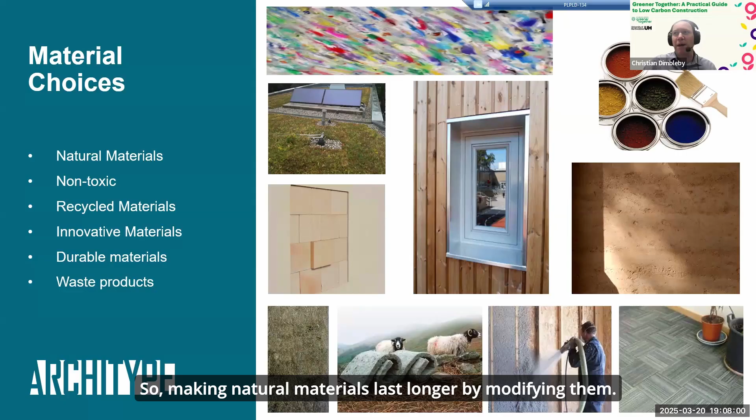Green roofs—so it's not just the material, but also what's going on around there, the elements that live there. In this case, the biodiversity in the soil and other things. To the side of that, you've got thermally modified timber, making natural materials last longer by modifying them. Some processes pickle them, some use other techniques to give longer duration.

To the right of that, you've got some rammed earth—I'll talk about a project using that a bit later. Similarly, straw bales as well, below that at the bottom left. Then next to that, you've got sheep's wool insulation, a fantastic renewable material—coming from the son of a sheep farmer, I'm very keen on using that material. To the side of that, you've got sprayed cellulose, which is recycled newspaper.

So timber broken down to its most basic purpose and reused is a great insulating material. And on the far right-hand corner, you've got carpet tiles made from reused truck tires.

So some of these are not natural, but they do show the environmental thought needed around product selection. If we move on to the next slide.

Okay, we've got time for a bit of a quiz, a bit of interaction. Which do you think is the best natural material? You can scan the QR code and we'll give you a minute or so to have a think about that. Do you want straw, timber, cork, earth, or bamboo? Do you want to all have a vote now? See which material do you think is the best natural material?

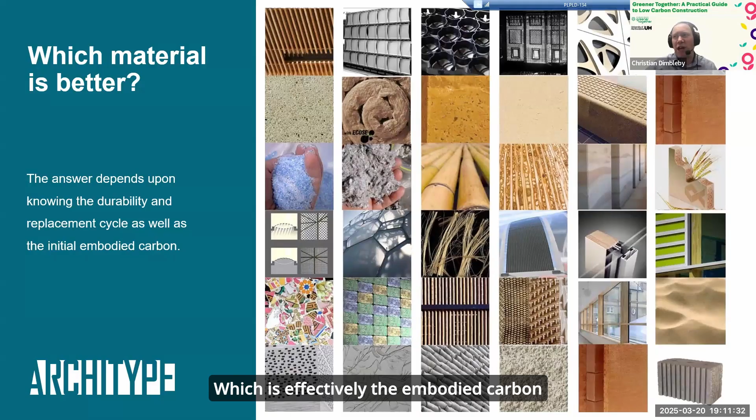But if we move on to the next slide, I think this was raised in the question, and it's always tricky, isn't it, how do you determine what is best? And it does depend on so many things. In this particular question, what material is better? You need to think about the durability, its replacement cycle, as well as the initial carbon impact, which is effectively the embodied carbon, the amount of carbon released in extracting the material, in manufacture and transportation of the material. And so you can get an answer from that, but there's still more things to consider.

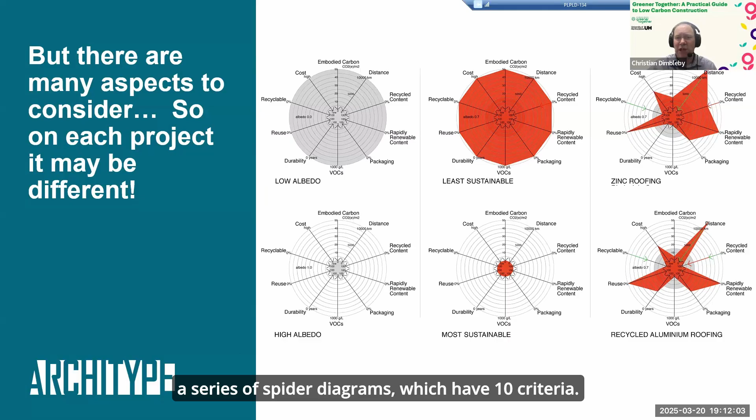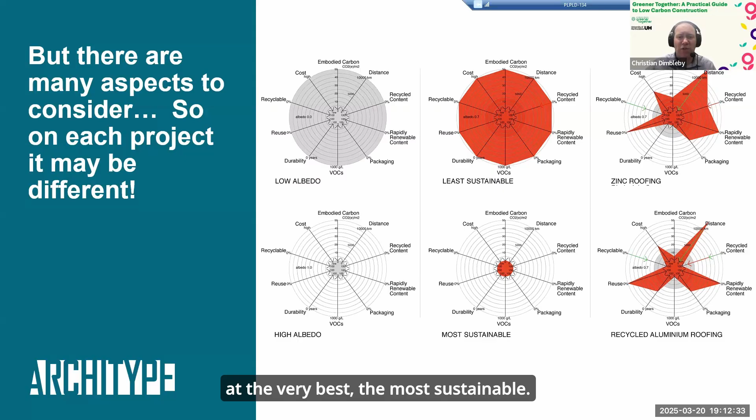So if we move on to the next slide, we created this spider diagram when we were trying to explain it to a project some time ago. In the middle, you can see a series of spider diagrams which have 10 criteria. The red is the least sustainable. So on the far outside, all of those things, whether it's embodied carbon, distance, recycled content, rapidly renewable content, packaging, VOCs, durability, reuse, recyclability, and cost, all of those are the worst aspects. And the bottom middle cell shows it the very best, the most sustainable. So there's a very small amount of red in that diagram.

But more than that, there's also this instinctive discussion about albedo. So that is an indication of how appropriate that material is to use. For example, something may be a very good material, it may be a very sustainable material in certain aspects, but it may not be appropriate to use that material. And so you have to have a reference point of how different materials compare.

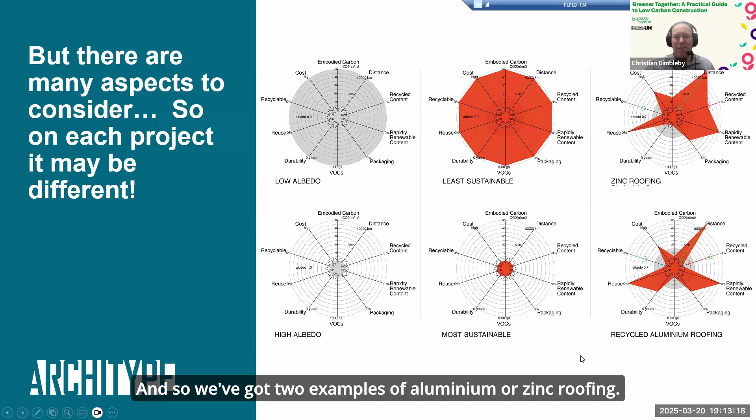So on the right hand side, we've got an example to try and explain it a bit more carefully, because this is quite complex. And so we've got two examples of aluminium or zinc roofing, so two metal materials for roofing, and you can see the very different impact on those two things, where the most red impacts are. You can see the grey albedo impact is the same, so that type of roofing impact has the same level of impact. That's where you hope to be under, but you can see where it exceeds that on some of the things like cost or distance for the resource, rapidly renewable content.

Neither of these are something which could be classed as natural and renewable within a 5-year timescale, and reuse. Some of them have better, some of them have worse scenarios. So in fact, what you have to try and do is work through all of the systems to try and see which one is the most important.

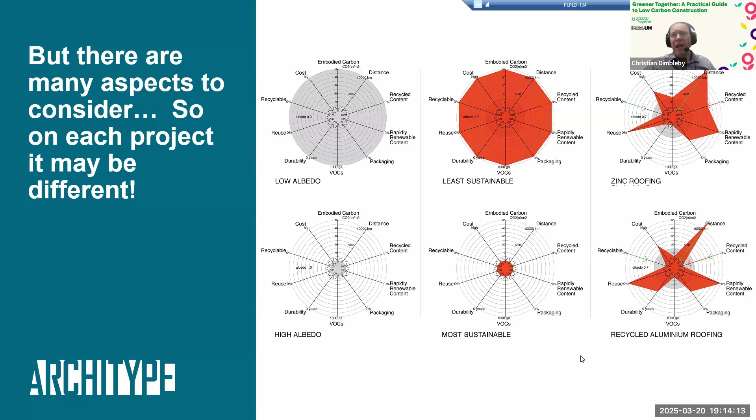But generally, if you just go on a simple assessment just on material, for 1 ton, you can see that the larger the figures, whether that's clay in this case, compared to the much smaller figures, so the bottom right hand corner you've got stainless steel, you can see how much different amount of material you can use for emitting 1 ton of carbon.

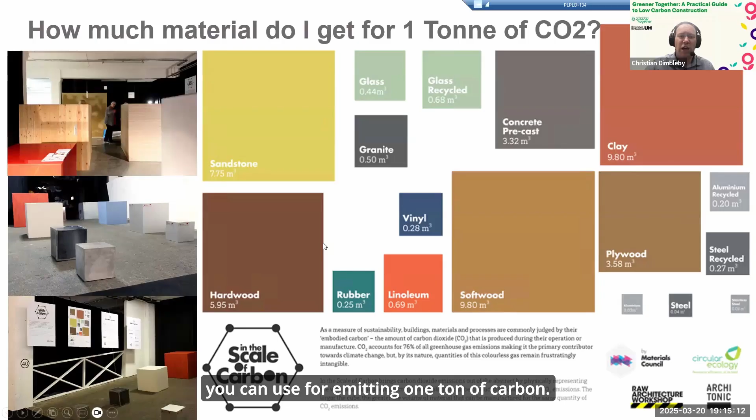So the bigger the area, the more material you can use, therefore it has less impact. This brilliant exhibition, In the Scale of Carbon, which was probably a decade or so ago, was a fantastic eye-opener for me to walk around and see those elements in space, to see the real impact of that carbon impact.

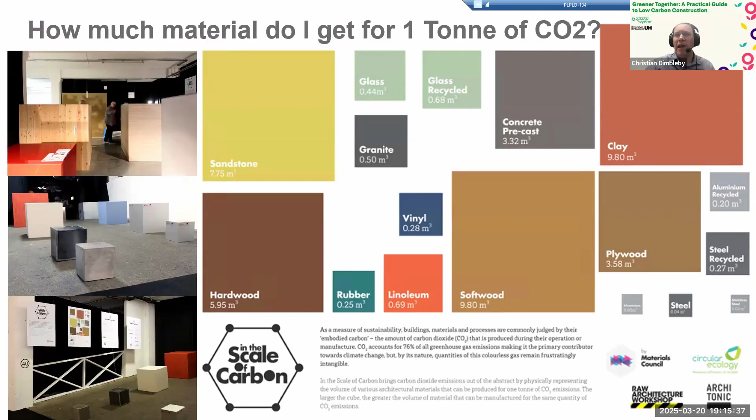But for myself, at Architype, moving on to the next page, a lot of what we try to do is use timber. That's our preferred method. I know obviously a lot of people voted mud as their favourite, but for us, we prefer timber. And I think there's lots of reasons why we do that, and I've tried to articulate some of them here.

Firstly, it locks up carbon. Now, I know a lot of people disagree with that fact - the terminology is called sequestration, and some factors account for it and some don't. But effectively, what we're saying is that carbon absorbed during the material's life is going to be locked within that timber. And as long as the building isn't burnt down or destroyed, that will be safely stored and not released into the atmosphere for some time.

It's a renewable resource. Timber is a fantastic material. Trees do grow, and if they're managed in the right way, can produce a really sustainable source of materials going forward. It's beautiful - the quality of the timber, as you can see, can really uplift spaces.

And actually, it's been shown through many studies to really have many health benefits. The term biophilia, resulting from actually seeing nature, has been shown to reduce stress and have many other health benefits. So it's very, very beautiful.

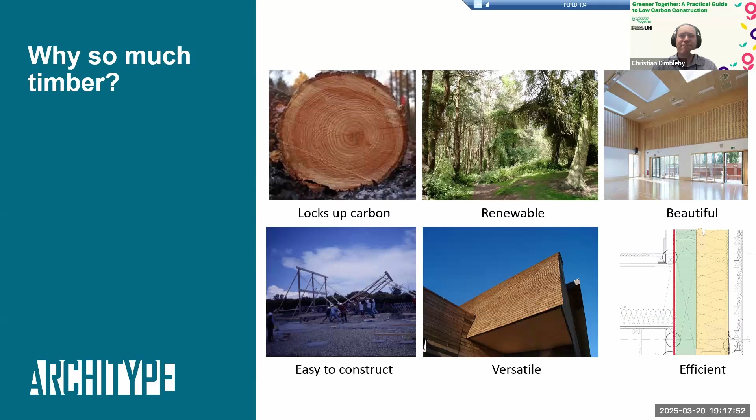So we're going to run another quiz now, and just ask what you perceive most limits your selection of natural materials. So do you want to have a quick vote on what things - this is a text description - what is your most challenging? And then I'll hopefully try and answer some of those when I go through some case studies in a moment.

I'm just going to have a sip of tea whilst everyone votes.

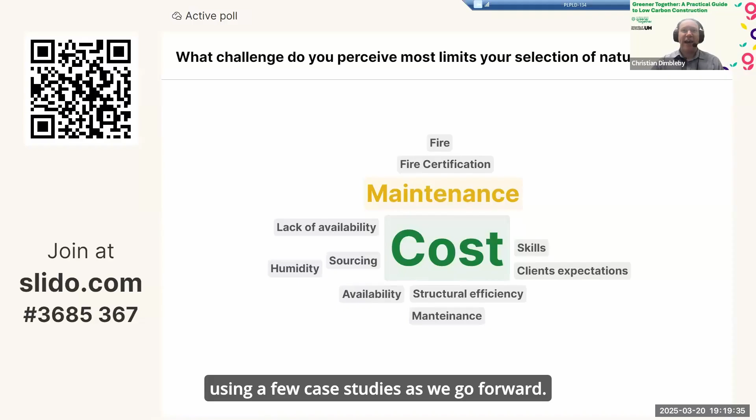There's some really great word clouds coming through. Yeah, lots of these are some of the things I was expecting, and we'll try and talk on. So yes, fire certification, maintenance - a great question, a great challenge for natural materials. How do we maintain them? Lack of availability, and skills, sourcing, humidity issues, availability and structural efficiency, maintenance, and clients' expectations. But yes, the big one is cost. So I'll try and talk about some of those using a few case studies as we go forward.

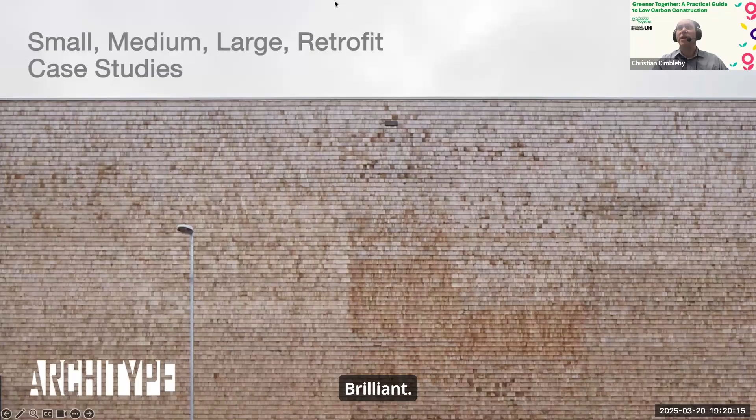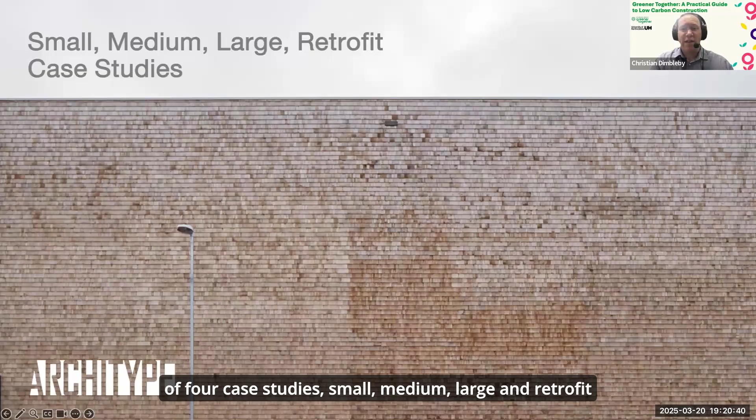Brilliant. So I'm going to talk through a series of four case studies: small, medium, large, and retrofit, to explain the benefits and challenges associated with each. And I'll try and pick up on some of those questions that were asked a moment ago.

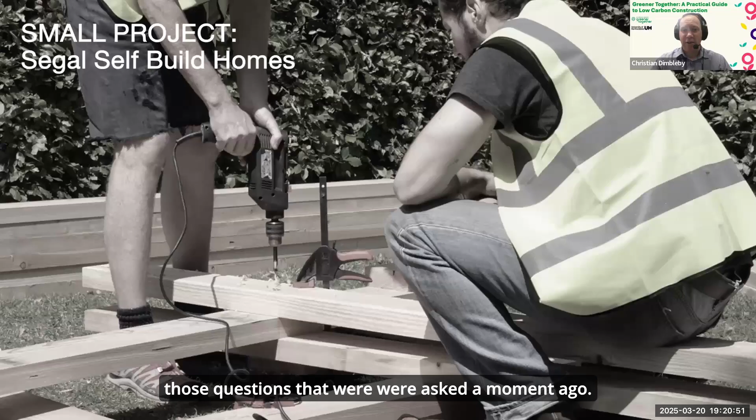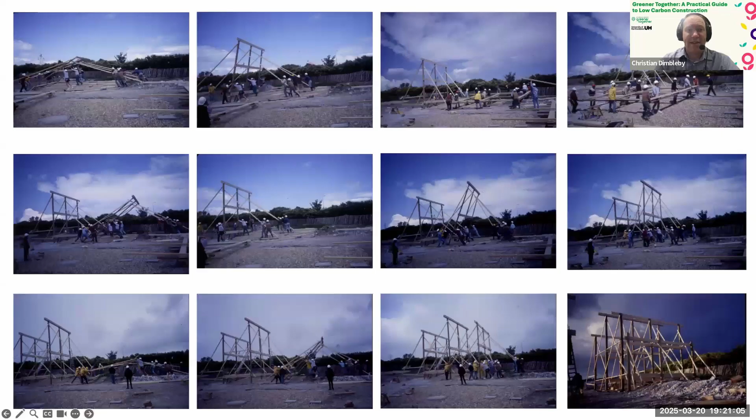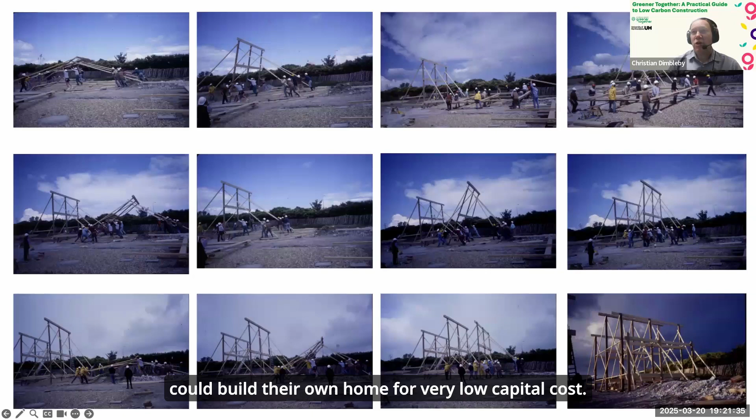So starting with small, and going back into the history of Architype projects with Walter Segal's self-build homes. Architype's earliest work was building self-built houses, and here you can see the benefits of timber construction. Previously unskilled people in the construction trade building their own homes, using a simple pulley system to raise the frame, and sweat equity involved with all the individuals building their own works, meant that they could build their own home for very low capital cost. And as you can see, it's as a group of people, but it's all put up very quickly.

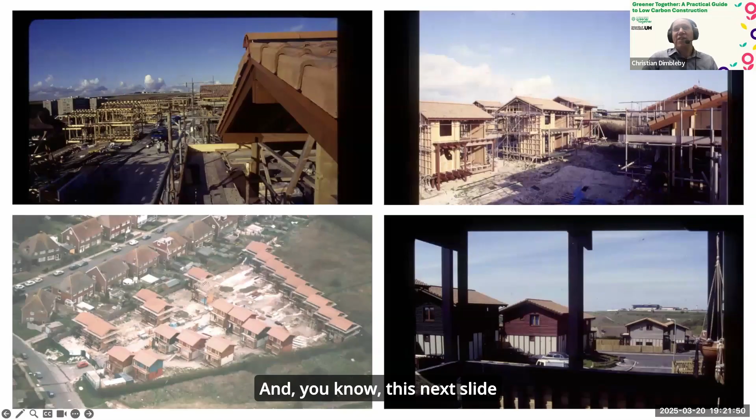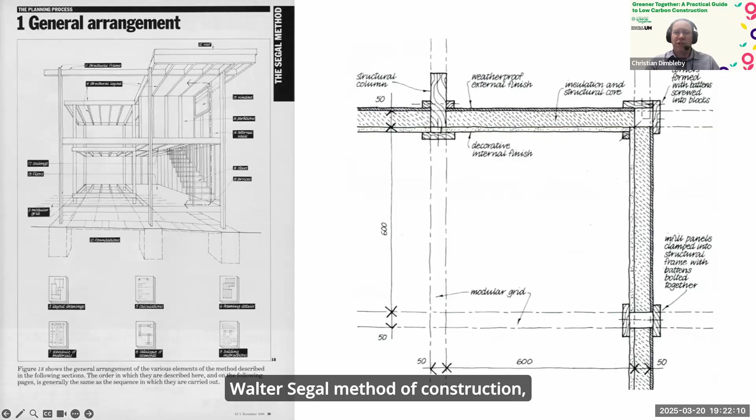And this next slide zooms out on that site. It's not just one individual house - you can actually build a community very quickly. So we've got low cost and speed combined with these actions. And this all centered around the Walter Segal method of construction, which makes building with timber simple - a straightforward structural grid system allowing ease of build. Architype took this even further by importing timber I-joists.

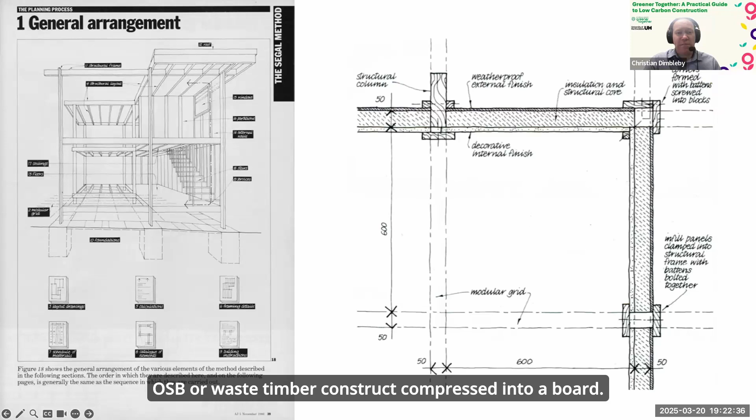Joists or beams made from a web of OSB or waste timber compressed into a board, with timber battens at top and bottom forming an I shape. These were first used on our projects in 1992.

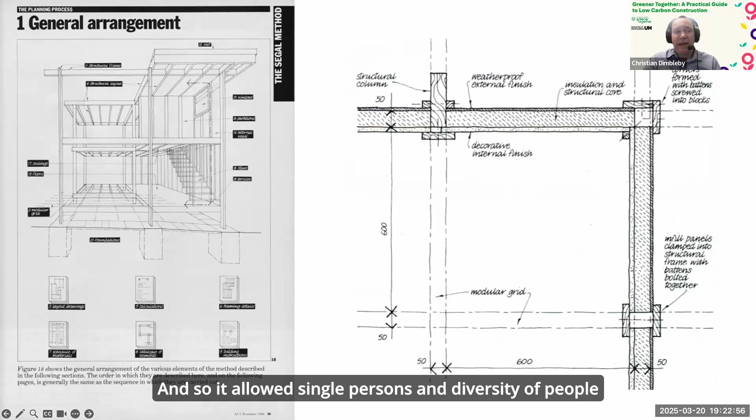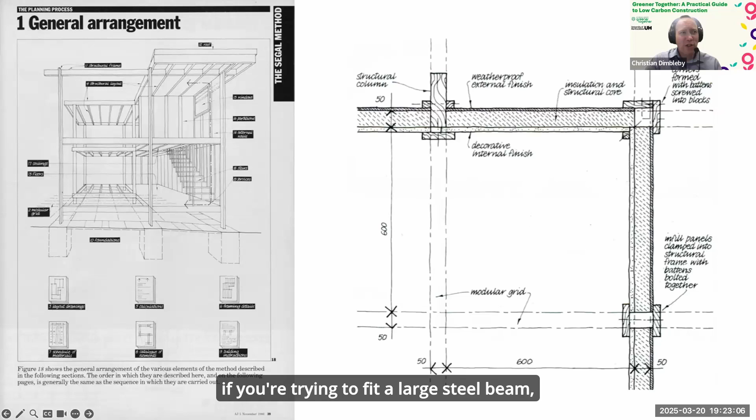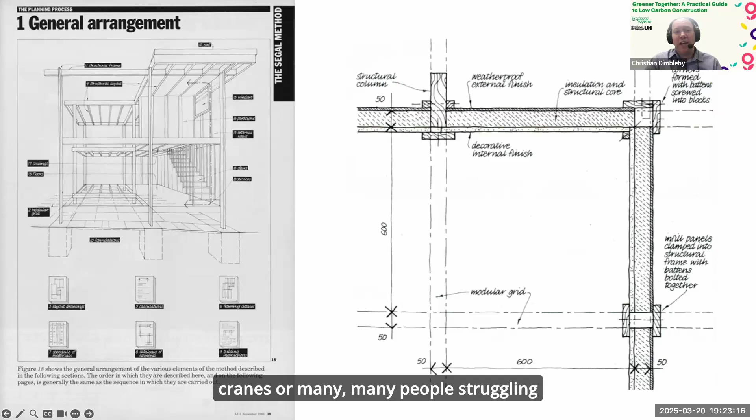The reason we chose this was because it was lighter weight, and so it allowed single persons and a diversity of people to be able to construct their own homes independently. If you're trying to fit a large steel beam, you may have seen people try to do that - the weights involved often require heavy cranes or many people struggling to lift a small beam. So the benefits of timber in this arrangement are low cost, simple availability, and lightweight.

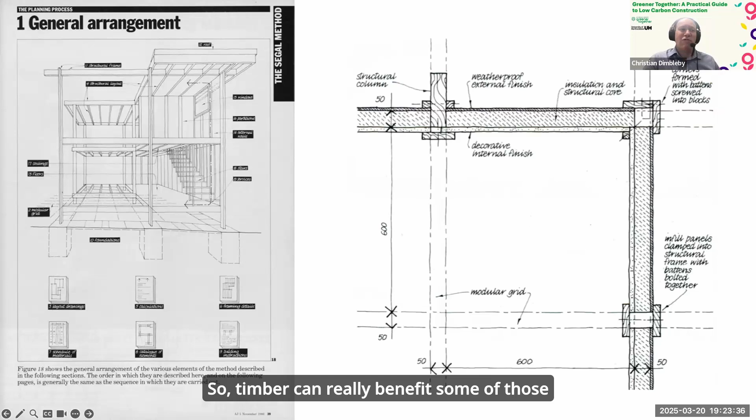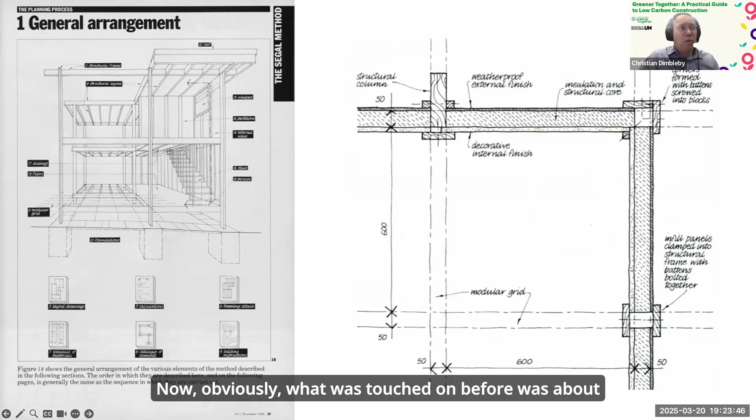So timber can really benefit some of those purposes and some of those challenges. Now, obviously, what was touched on before was about some of the things about durability.

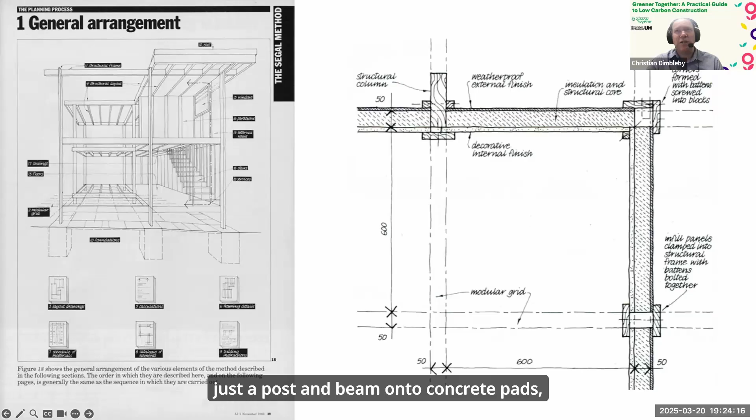The idea of these simple homes was that they could be built in a way where they could be deconstructed and rebuilt. They could be clad over with a secondary protection or protected with a varnish or staining. They often had big eaves to protect the timber. And the simple structure, as you can see on the left-hand side, just a post and beam onto concrete pads, meant that you could work with varying landscape levels. So I think it challenges and adjusts with most of those things.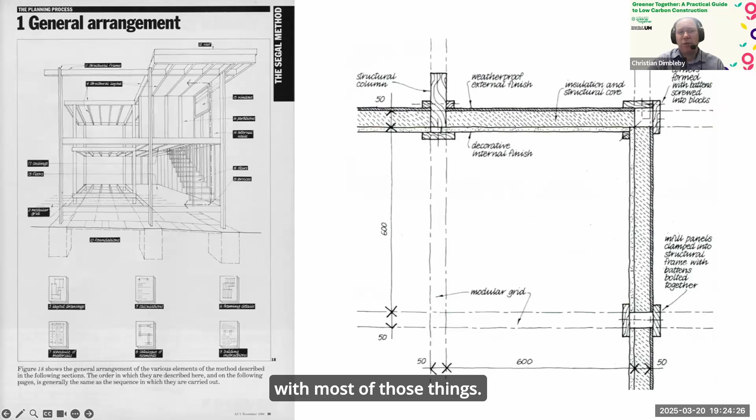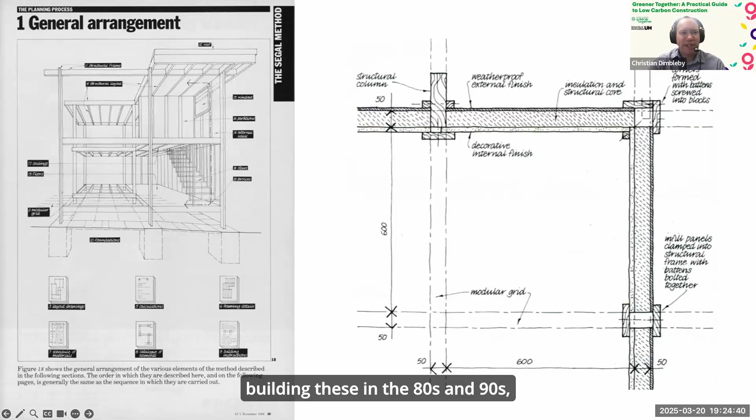But yes, would these types of buildings be available to be built nowadays with fire challenges? That may be more challenging. But certainly when we were building these in the 80s and 90s, it was a very accessible and easy way of building.

So that's the small scale building. The next scale up is a medium scale project, and here I've selected the Genesis project in Somerset. It's a real true showcase of sustainable materials. It's a whole series of pavilions of different types of materials to demonstrate to students of arts and technology how buildings could be built and should be built. You can see in this diagram there's a clay pavilion, a timber pavilion, an earth pavilion, a straw pavilion, as well as a water pavilion.

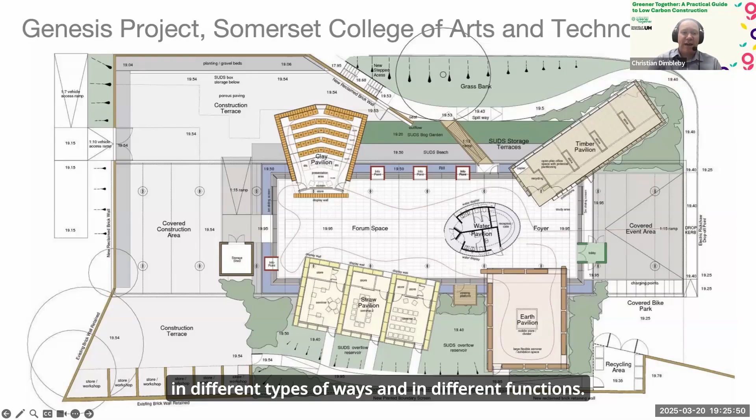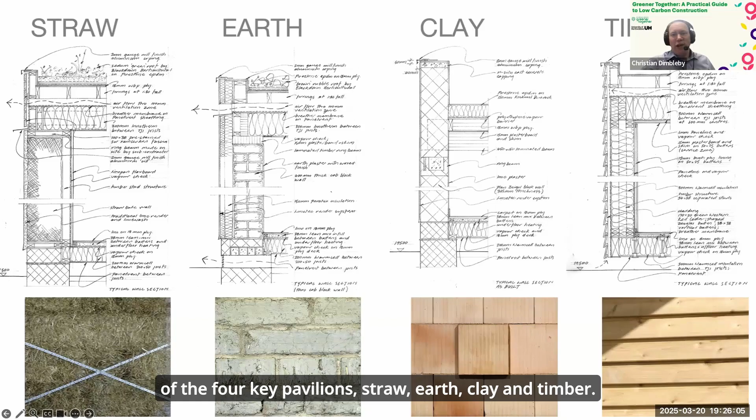Each of those different pavilions were made out of their respective materials in different types of ways and for different functions. If I show you some of the details, here you can see the different design sketches of the four key pavilions: straw, earth, clay and timber. Each has its own unique qualities.

What I will say is that compared to timber, these materials are much more dense and therefore require much more foundations, and generally in the past that's meant concrete foundations, so that impact needs to be considered. I do note that there are advancements with modern technology - my colleague Seb Loblomas has just built his own straw bale house, built on a timber frame with screw piles.

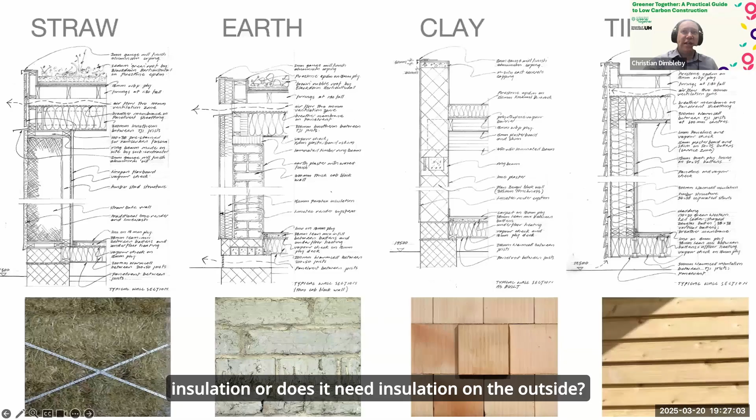So there are alternatives now to concrete, but you can certainly see that thickness. There still needs to be thinking around insulation - does your earth block wall have enough insulation, or does it need insulation on the outside, which is what we did in this situation? Does it have the appropriate fixings and structures? Does it have the right ventilation underneath to make things breathable to deal with the moisture issues as was discussed?

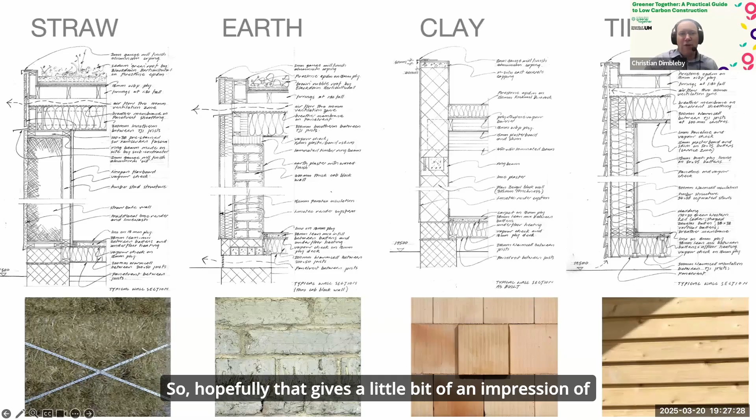So hopefully that gives a little bit of an impression of how you can build different types of buildings, and this is what the finished building looks like in some of these photos. You can see that often these new natural materials don't need additional finishes - they don't need to be lined with plasterboard or other materials. So that has a unique way of reducing environmental impact and minimizing the cost of those building elements.

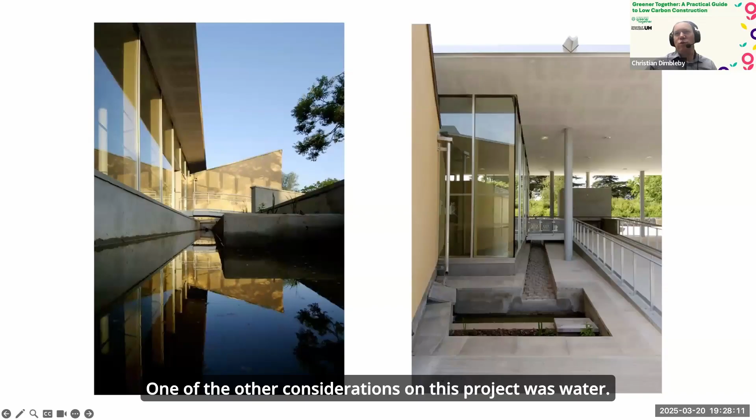One of the other considerations on this project was water, and so here you can see the sustainable urban drainage system wrapping around the building, with the roof rainwater spout on the right-hand side picture pouring into the ponds.

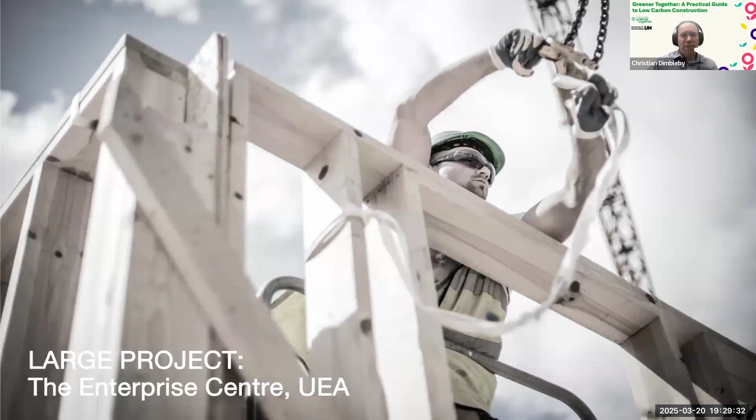The next project is a more recent one, the Enterprise Centre at the University of East Anglia. I was involved in this project from beginning to end, so I know this one the best. It's a large-scale university project, and it not only uses natural materials, its key focus was to use locally sourced ones.

This building, sited in East Anglia in Norwich, really wanted to articulate the natural vernacular. So we've used Norfolk reed on the roof and Yeoman wheat straw cladding, as well as many other natural materials, and that really gives its identity throughout. You can see the reeds and the straw in the middle, and on the left-hand side, our initial materials map of where we were going to get all of the materials from within a 100-kilometre radius.

Here's a bit more detail about that thatch facade. It was a unique design idea - the bespoke vertical thatch cladding, certainly the first in the UK, based on an integrated system on a plywood frame, as you can see detailed on the right-hand side, that neatly fitted together all the way across so you couldn't see any of the joints. You just got one continuous thatch cladding.

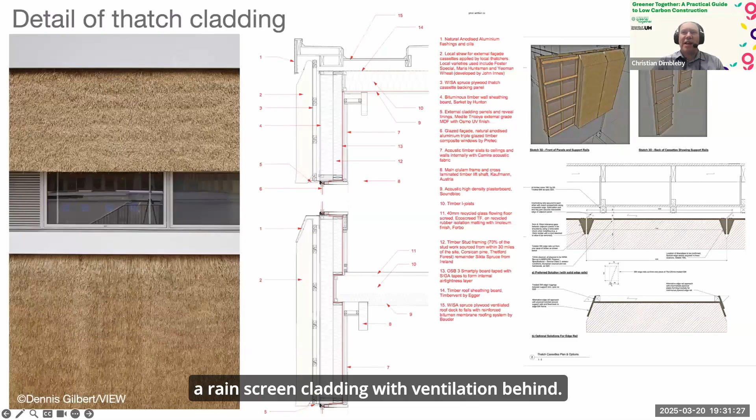You can see it's a ventilated cavity, so it's not providing structure. It's merely a cladding, a rain screen cladding with ventilation behind. But it does help in terms of modifying the temperature of the building internally, reducing the amount of heat gain within the building, making it exceptionally thermally stable, even in very changeable climates.

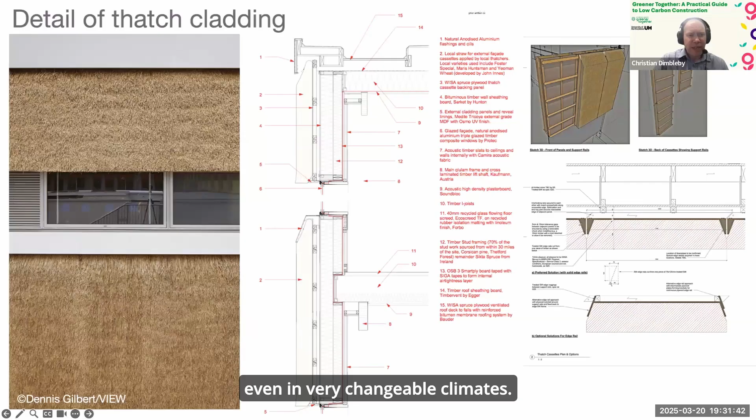It's also very simple and easy to install. This managed to get the whole of the building clad in just under 2 weeks, dropping it onto a split batten process. So speed of delivery was also one of the great benefits of this material.

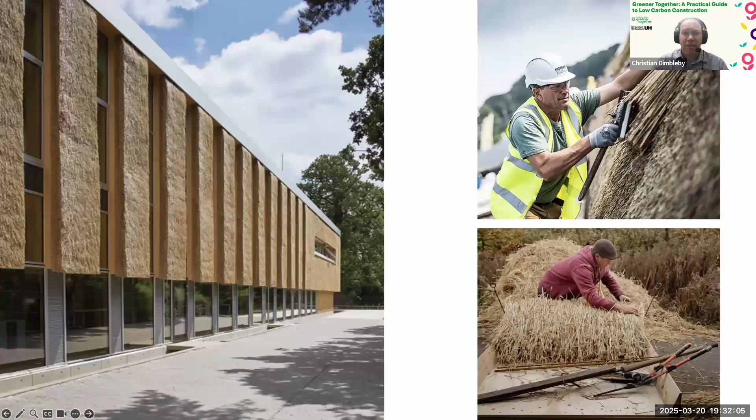Another benefit, shown with the photo in the bottom right-hand corner, is that thatchers normally are only able to work during the summer. That's because that's the only time when the weather's good enough to be working on the roof, as shown in the top photo. But with the idea of building prefabricated thatch panels, these were actually manufactured in sheds. Therefore, we were allowing the thatchers to gain extra work and extra money during the year by doing their jobs in the winter. So there was benefit to the local economy and also savings on time and cost for the material projects.

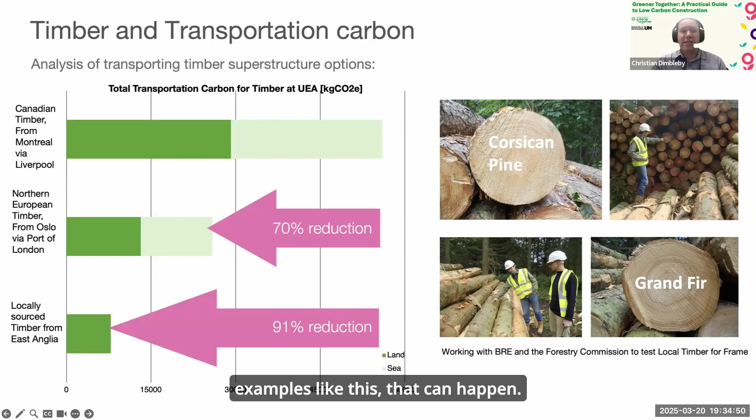In reality, it wasn't quite as easy as that, because the two species of timber we chose are only generally used for fence posts. They hadn't got any testing, so to get them tested, used, constructed and manufactured, we actually had to take them to Ireland and back. So the benefit wasn't as great as shown there, but that's because our local economy isn't set up. We need to invest more in recognising our local materials, being able to grade them and source them properly. Hopefully, with more examples like this, that can happen.

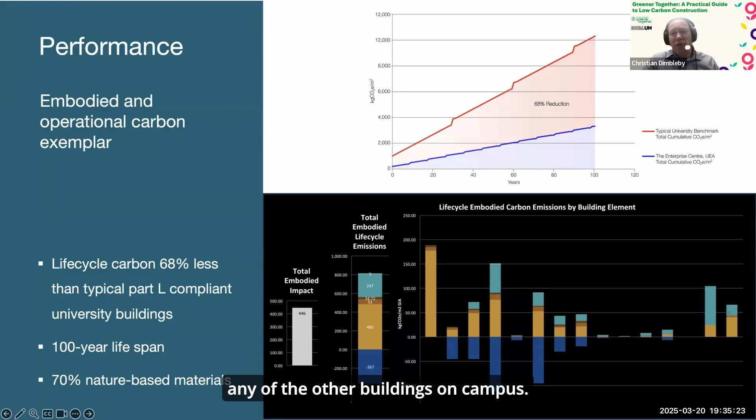The performance of this building is one of the best in the world. It's assumed to save a 68% reduction in carbon, both from operation and from upfront embodied materials, over its 100-year notional life. It's also far cheaper to run than any of the other buildings on campus. Yet with all the natural materials and all the exceptional performance standards delivered, this building was built below the average of the university cost rates.

That was simply because of the contract used - a sort of collaborative sharing contract, which allowed the benefits to remain for the client, reducing costs and reducing arguments between contractor and design team. And actually, that's the best way to do things. So when we talk about costs, we need to think about the whole system. Is it the natural materials that are wrong or expensive, or is it actually the procurement method we're using to deliver those?

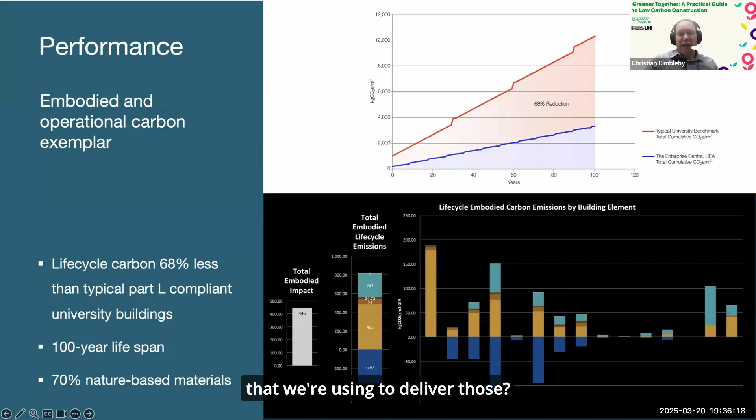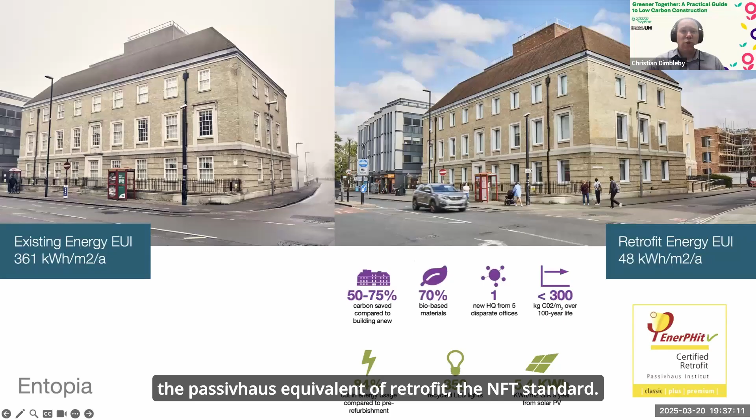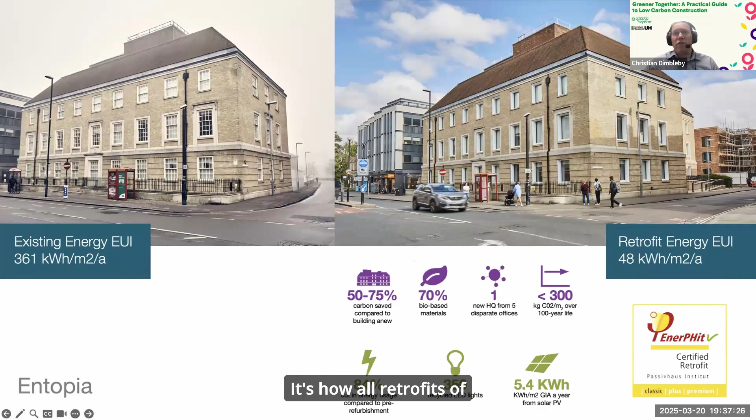Making a healthy environment by achieving the Passive House equivalent of retrofit, the EnerPHit standard, making the space and the environment much more healthy and non-toxic, and also generating energy on the roof. It's how all retrofits of buildings need to be going forward.

And a core part of this was using natural materials throughout. The insulation you can see there is a cork lime mix sprayed onto the existing wall, with then a timber fibre insulation bat installed on top of that to give it even more thermal performance. It's about 80 millimetres of insulation in total, resulting in an 84% reduction in energy.

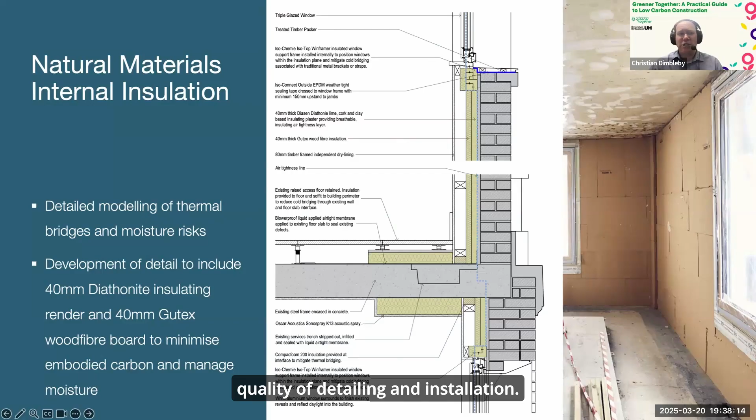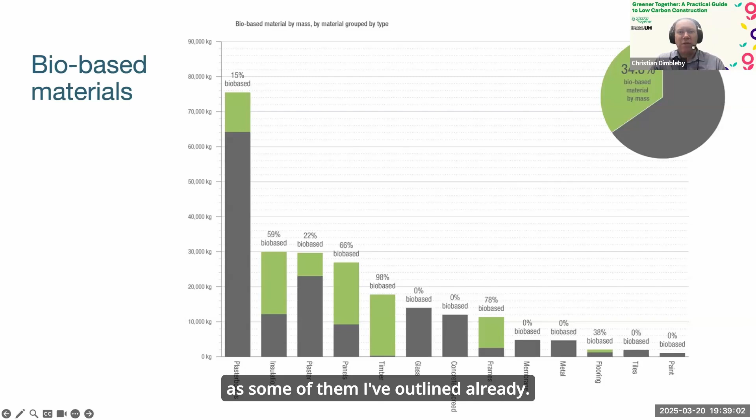So really big savings through good quality detailing and installation. But in terms of a retrofit, you're not going to be able to do everything with bio-based or natural materials. Here you can see that we achieved around 35%, and it obviously varies between the different types of elements that we're using. Insulations were high, timber was high, but some of the other elements are very, very low. But we should try and use natural materials wherever we can, because there are so many benefits.

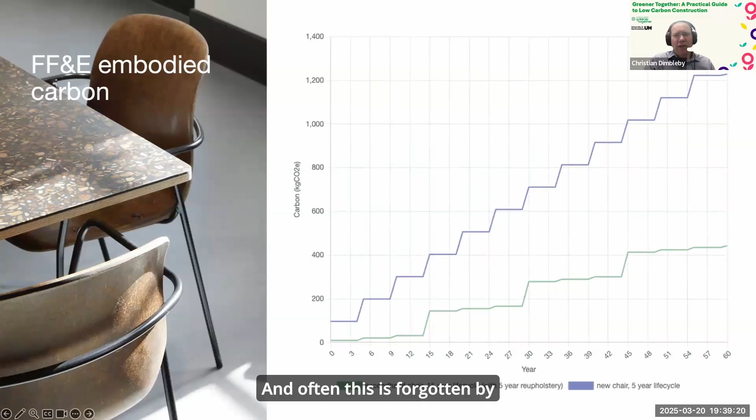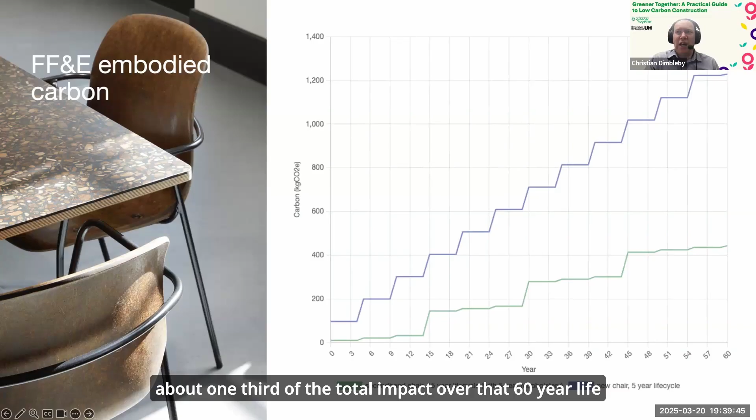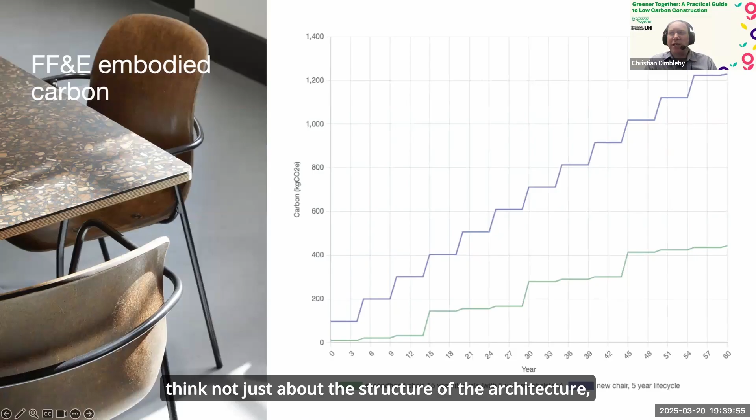One of the things we discovered on doing this project was that furniture had a fantastically big impact on the overall environmental impact of buildings. Often this is forgotten by designers, architects and clients. Here you can see the graph and statistics of the impact of using new furniture compared with using bio-based materials and/or second-hand furniture. There's a significant impact, about a third of the total impact over that 60-year life, through using bio-based and second-hand materials. So it's really important that we think not just about the structure of the architecture, but also about every element within, whether that's furniture, fittings, or other things.

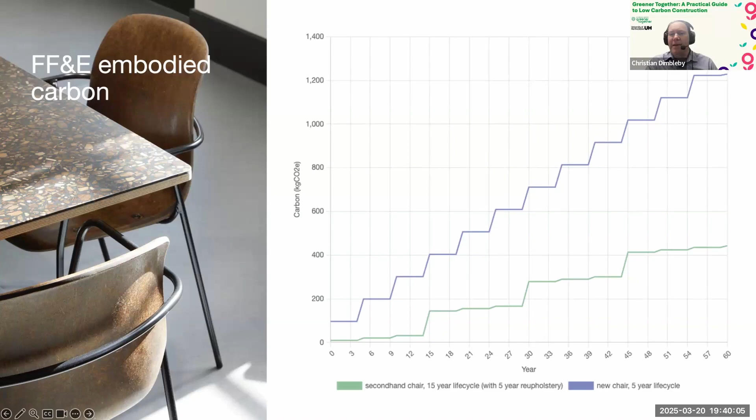So hopefully that's roughly come to the right sort of level of time on the talk. I was going to throw it open for questions and pick up some of those topics that people wanted to discuss more. If any of those case studies or other questions arise, please do speak up and I'll be very happy to talk through them.

Thank you, Christian. It was very interesting. We have already a question from Adit, which asked the question during the presentation. Probably it's a question for the end, and I would suggest him to do it at the end because we can have a chat. So, Adit, do you want to ask the question?

Or maybe we can read the question. I will read it for Adit: Do you advocate for natural materials as practice, no matter who the client is, or is this something coming from the client in the first place?

So, yes, I would always advocate for natural materials for all clients, but obviously a lot of clients come to us because of the natural material projects that we have delivered and designed. But touching on some of the points I mentioned, I think biophilia, health benefits, and lower carbon are key things which most clients need to be considering and should be adopting. So it won't be appropriate in all instances.

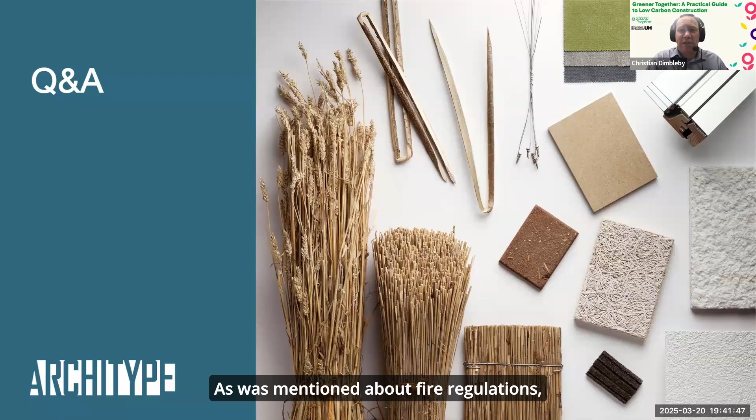As was mentioned about fire regulations, at the moment it's very difficult to get anything above, say, 11 or 18 metres externally that is a natural material because of combustibility issues. But there are other solutions to most things, and we should try and maximize natural materials where possible.

Obviously we need to do it in an environmentally sustainable way. So one of the questions is, how much material do you need? Often when talking about timber, people may go to the idea of using cross-laminated timber or solid timber glued together. But actually, in most instances, if you can get away with timber frames—timber joists—you use a lot less material. And if we can use a lot less material with joists and plywood decking, why would you use more timber?

You want to keep the natural timbers in the ground and just minimize the loading, minimize the design. So on the University of East Anglia, for example, one of the really radical things we did was in the client brief: if you want to use natural sustainable materials, we're going to have to derogate on floor loadings. The structural engineer says we can do that—it's very safe—but we're not going to take the standard requirement. I saw an Architects Declare presentation once where he said you need 100 people stood on one metre squared to breach the loading limit, when actually you can probably only get a maximum of 5 realistically.

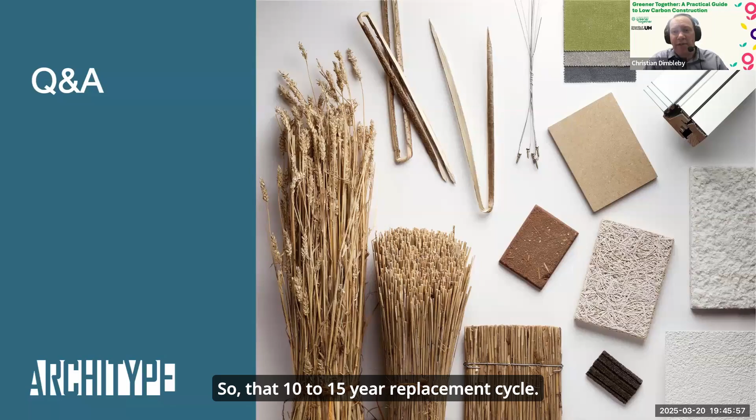On our vertical thatch cladding, we have the benefit that the rain instantly drips off the wheat straw, hits the side of it and drops down. So the master thatcher of East Anglia, who we're working with, actually thinks it will probably have a life expectancy of 90 to 100 years. We're approaching that 10 to 15 year replacement cycle, so they'll probably take an inch off and refresh that, and it'll look lovely, beautiful, golden again for a few years, then dull back down.

So yes, if you work with the way natural materials have been used - if you look around, I come from Warwickshire, there are beautiful thatch houses all the way along. They have ways of making that, either turning it black or keeping it in natural blonde colours and dulling to a grey. But they know how to maintain those and look after those. Some of those buildings are centuries old, so there's no reason it can't be maintained the correct way. But you do need to understand how you do it, which requires some specialist training. It's not difficult - I did some thatch training the other day when I was at the site - but it does need a bit of training to understand how to do it, and it should last a long, long time.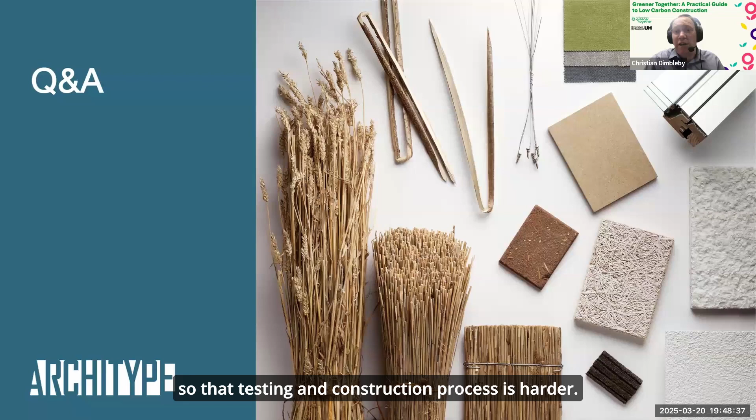I think there is still resistance because it hasn't been widely adopted. The challenges post-Grenfell, with regimes wanting much more testing, is obviously going to be more onerous on products that are natural, since they don't have a specific manufacturer body to test them and provide data. When we were doing the University of East Anglia project, the information trying to get on straw and thatch was very tricky to get hold of - EPD data, life cycle information, all of these sorts of things. So that testing and construction process is harder. Similarly, with locally sourced materials, it's harder to get that - you might have Natural England forestry seals grown in Britain, but they may not have the FSC certification which some people will require for their accountability or for their BREEAM scores or other such things.

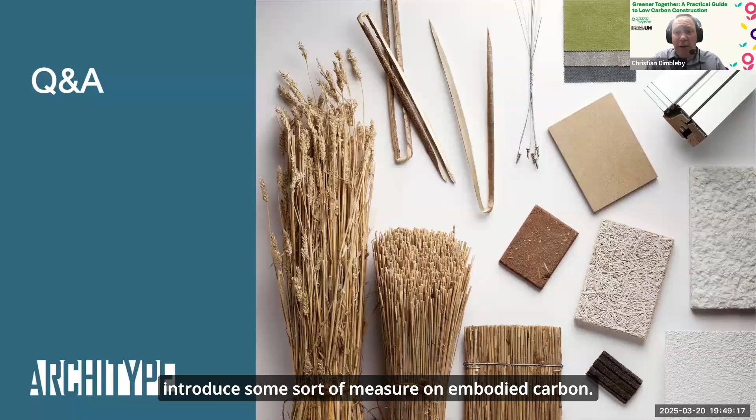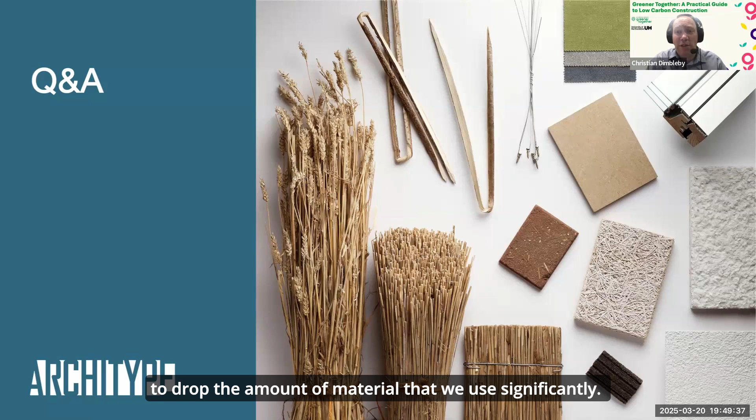Using natural materials and local materials is not without challenge. But hopefully the government will soon introduce some sort of measure on embodied carbon. It's starting to happen in places, a bit in Wales, a bit in Scotland. The GLA on large scale projects do insist upon embodied carbon calculations. And if people adopt the UK net zero carbon building standard, they'll realise that we really do need to drop the amount of material that we use significantly. And the only way we can really drop it is through natural materials.

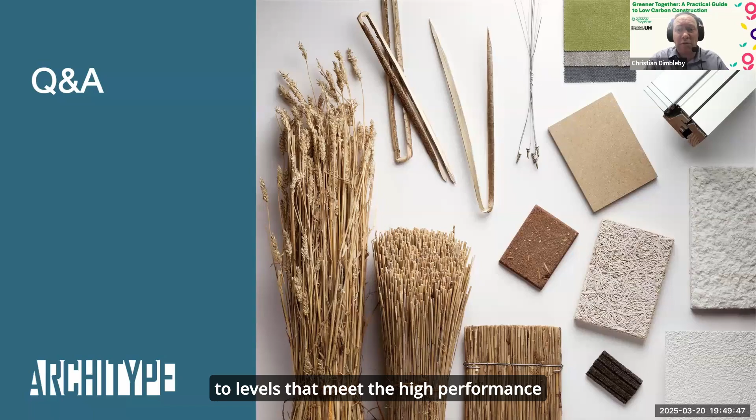We should be building now to levels that meet high performance energy performance in use, but it's the embodied carbon, the upfront carbon in natural materials that we really need to tackle. So switching away from steel and concrete to natural materials is the only way, especially with petrochemical materials. Insulation materials have had a lot of financial backing to be able to deliver them cheaply, but I think people are realizing that environmentally they're not good, for fire purposes they're not necessarily better than natural materials. So there should be a recalibration.

It was interesting, one of the self-built buildings we built many years ago actually burnt down, and it was filled with cellulose insulation in Lewisham. Lewisham Fire Brigade, this was the first time they'd come out to a building with cellulose. They didn't know what it was and they wouldn't want to go near it. But because it was effectively just recycled newspaper, it actually charred like a timber log and then self-extinguished. There's video cameras of the Lewisham Fire Brigade going to the site, not going near it, it's self-extinguishing, and them saying, we love this material, why is everyone not using it? And this is 20, 30 years ago.

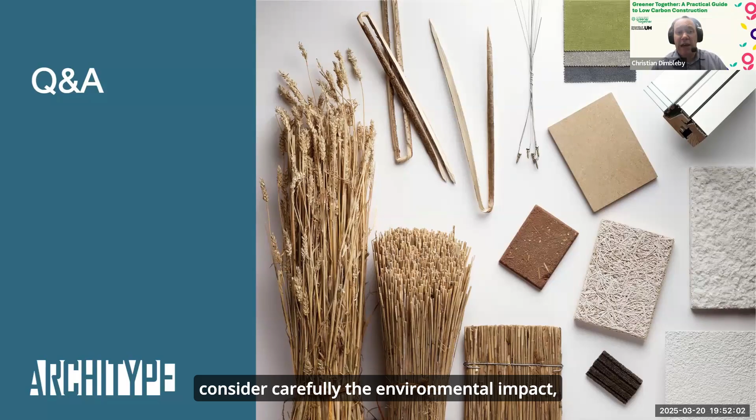But why still? Well, exactly. So natural materials do have some inherent qualities which actually make them much better, whether that's slow absorption of thermal heat or self-extinguishing, and we need to be promoting those more and more. There are some great organizations out there doing that, the Alliance for Sustainable Building Products and others. But I think until legislation comes in on embodied carbon or other things that really forces developers or designers to consider the environmental impact carefully, it will still be a tough sell.

Yeah, future home standard is such a disappointment, isn't it?

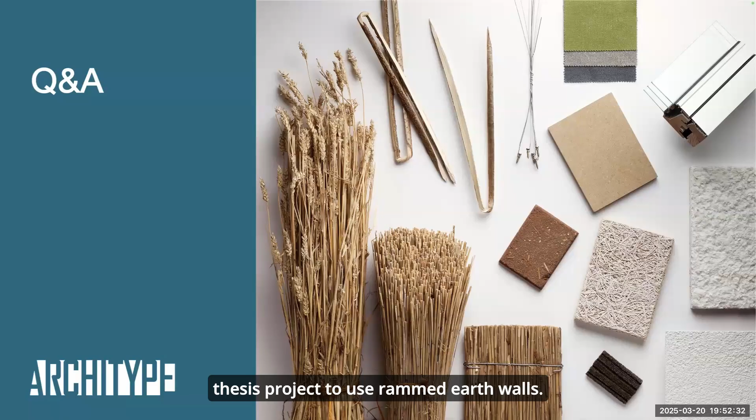Hi, yeah sure. I'm actually proposing for my thesis project to use rammed earth walls. So I was curious to know what type of insulation should I add in, or would it be okay if I just have that natural rammed earth wall as insulation? Just curious to know what kind of solution there would be. Yeah, thank you.

Unless you're making the rammed earth walls very, very thick, I think you probably will need insulation. One of the best examples of that is at CAT, as our previous questioner will be able to attest. There's a great rammed earth building there, but I believe that also has external insulation and is rendered on the outside. One of the benefits of putting external wall insulation is that you get to see the beautiful inside colours of the rammed earth, and you also protect it from water and the elements.

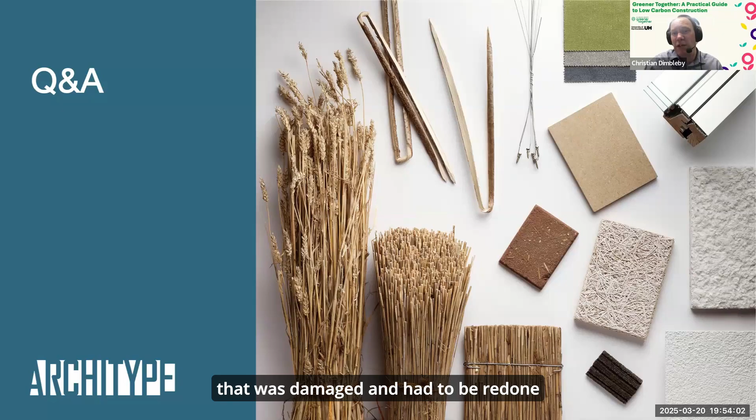Rammed earth is unfortunately susceptible to moisture and water and needs to be well protected. Part of the rammed earth wall at the Eden Project got attacked by water because the overhang was big but not quite big enough, so that was damaged and had to be redone or protected in some other way. So you should probably put some insulation on the outside. I don't know what the latest U-values are or how thick you'd want to go if you were not putting any in, but I would imagine it would need to be a very thick rammed earth wall if you had no insulation at all.

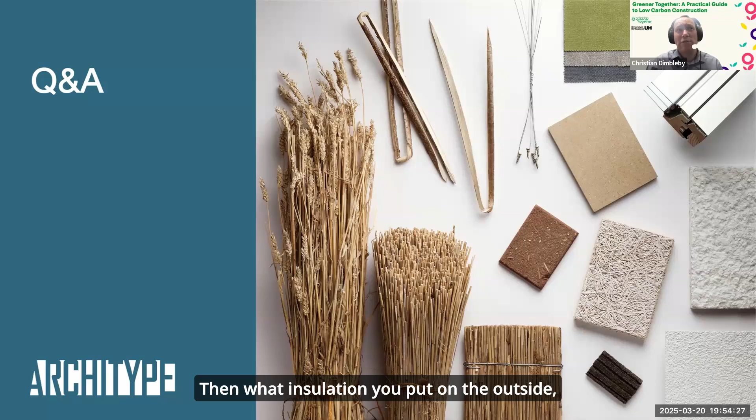As for what insulation you put on the outside, I think you'd want a natural breathable insulation material. I would avoid petrochemical based solutions because they will stop the breathability of the natural moisture - moisture absorbed from the room into the earth wall needs to get out to the other side. So you could use cellulose if you had some sort of formwork around it, but more likely you'll probably use something like natural wood fiber batt or similar, with a lime render on the outside to allow breathability all the way through.

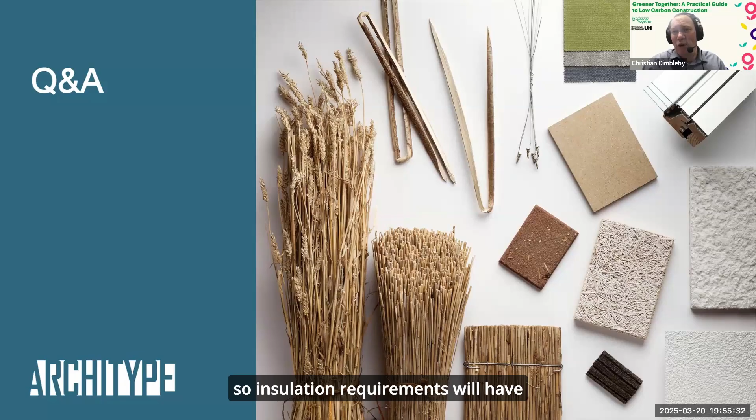But yes, it would probably be worth investigating the CAT project, and if you have a look at the Genesis project as well, the details we showed there at scale, you can have a look and see. But that was 2004, so that was quite a while back, so insulation requirements will have increased, no doubt, since that time. If I can just jump in, CAT do short courses on rammed earth, I think weekend stuff, or maybe a week.

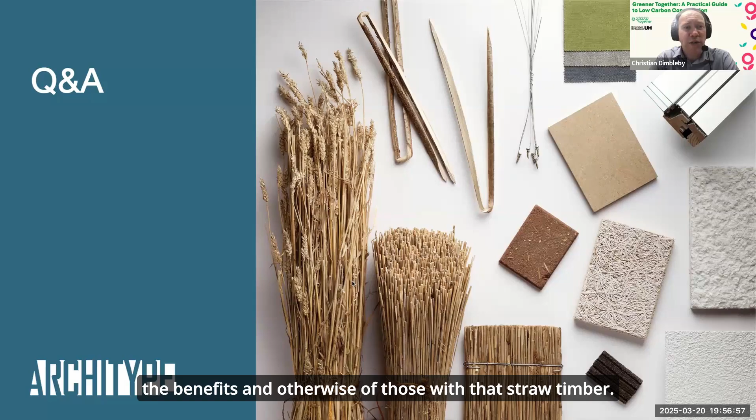There's lots of books. I did consider putting a slide with all the books I've talked about and read. There's some great books, so I'll list some recent examples. Hattie Hartman and Joe Jack produced a book called Materials last year, a fantastic book that goes through a whole series of natural materials, telling you the benefits and otherwise, whether that's straw, timber, sorry, lights are dimming, I had to activate those, straw, timber, all the way through to things like mycelium and other such things.

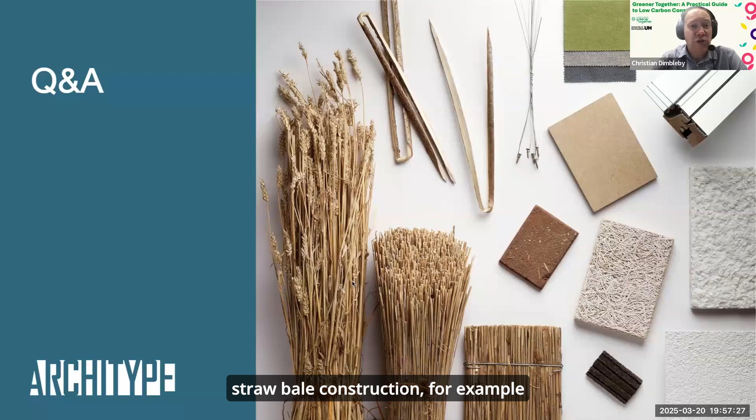So do have a look at that one. There's a good stock of older materials, specific books on particular projects, so you can easily find books associated with straw bale construction, for example, for hemp construction, various different individual books, timber as well. There's lots of really great books on timber buildings, but most of the ones I've read are probably quite old. So I'd have a look at, as I say, the Materials book by Hattie Hartman and Joe Jack - it's a very good primer for understanding, and has a really good overview of EPDs and other things at the front.

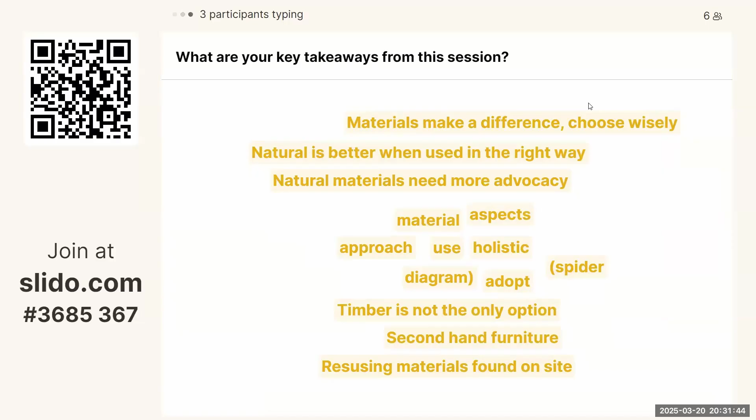Some really nice answers. Natural is better when it's used the right way. Great, that's some really good feedback, and it looks like everyone's learned quite a lot from this session.